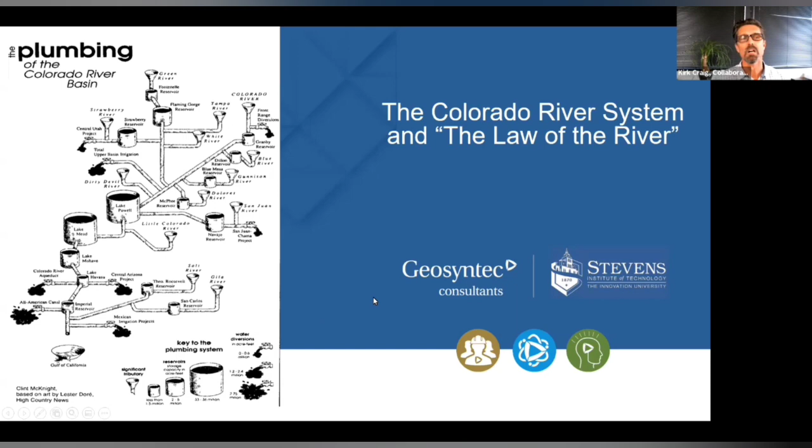This is a cool little illustration I got, from the High Country News, a publication up in some little podunk town in Colorado, made back in 1986. It makes you think of the Colorado a little differently, especially when you look at the lower left there, this great gulf where the mighty Colorado that carved the Grand Canyon now fizzles out before it reaches the Gulf of California. The reason is we just plumb everywhere, diverting and maneuvering and storing every penny and every drop, and that's what's led to this.

I won't really go through all these. It shows how long the Colorado River is - about 1,000 miles less than the length of the Mississippi River, and the whole Colorado River Basin is quite a bit smaller than the Mississippi River, but relative to it, we work this river hard.

I don't know if you guys talk about acre feet per year - always when you talk about big volumes of water, we talk in acre feet. One acre foot is about 320,000 gallons, enough to supply a typical family of 5 with water for a year. So you can look at this scale, and that number I have highlighted about the volume of the Colorado River is very controversial - notice 14 million acre feet, but that number is what's got us in trouble.

This slide illustrates the little red things, which are all the diversions. Like we talked about in the last slide, there are little taps that come off the Colorado River. The red has taken water away from the Colorado River and out to major metropolitan areas: Southern California, LA, San Diego, Phoenix, Tucson, Salt Lake City, Las Vegas. It's important later because when it comes to water rights, the date at which that new supply line pulled off the Colorado River is what gave them grandfather rights.

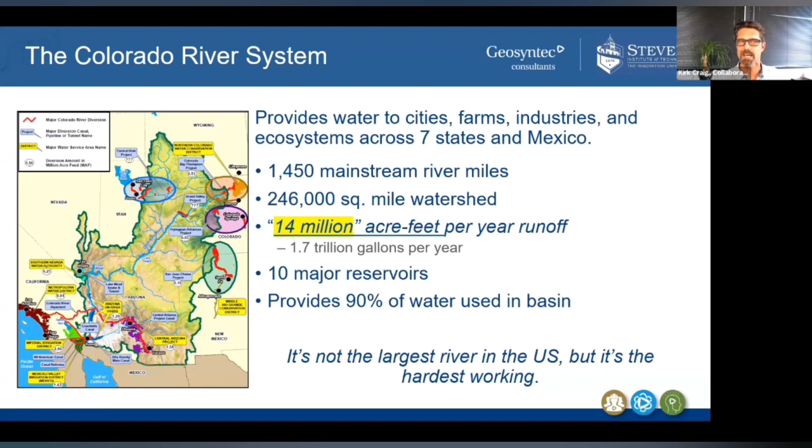So when they go to cutbacks, it goes in reverse order. Interestingly, Arizona, where I live, has the largest portion of the Colorado River but has the least grandfathered, most junior water right. So even though we share all that, we're going to get cut first compared to California, who tapped into it first and diverted to San Diego. So anyway, a little bit of background.

Go ahead, Tasha, next slide. I won't really talk about these. This is just to show you how large the Colorado River Basin is, how many different tribes and cities depend on it, and the amount of habitat associated with it. Its GDP puts it as the 12th largest globally if you look at its gross domestic product. Next slide.

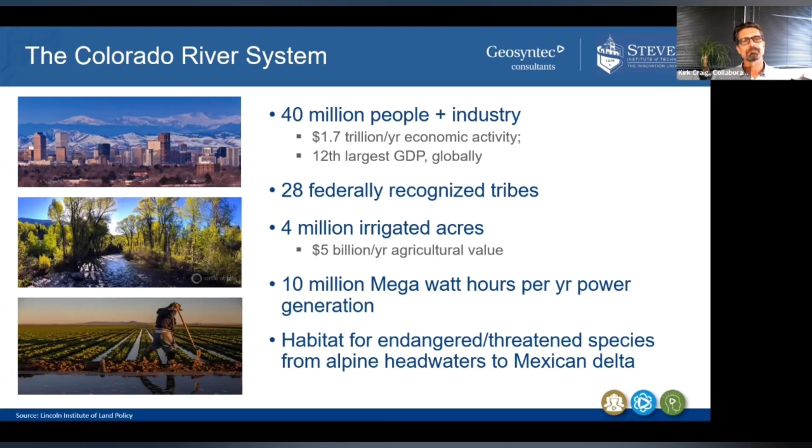So Lake Mead is the barometer, the thermostat. It's behind Hoover Dam. There's some eye-opening quotes here from about 4 years ago. I first did this presentation in 2018, titled 'Where Will My Water Come From in 5 Years?' Unfortunately, when I first did it, things sped up even more since. The picture on the right shows Lake Mead, and the level on Lake Mead is what dictates these water cutbacks. All these states got together and said, okay, when Lake Mead hits these levels on the left, that's feet above sea level, we'll trigger these shortages.

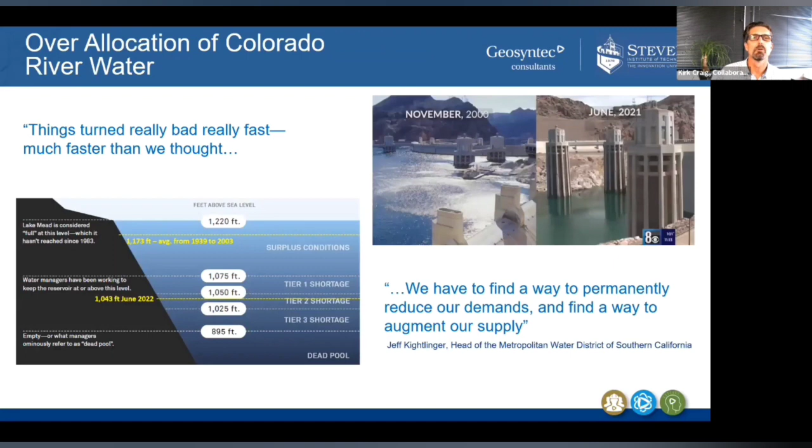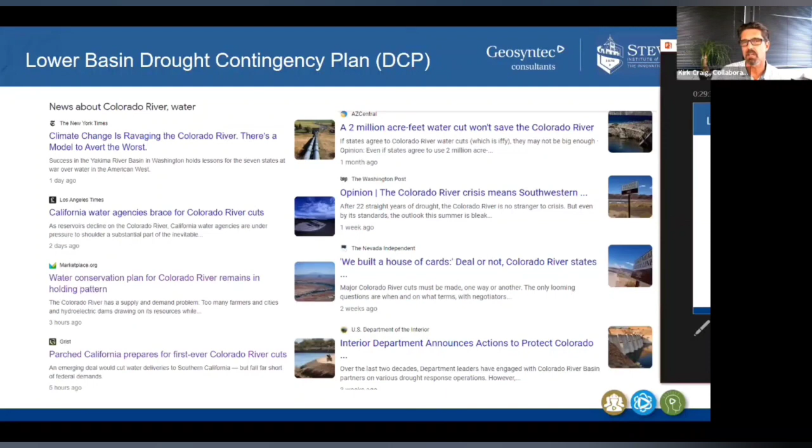This is the news now, from today. Pull that off — now look at Lake Mead. So now we're fast forwarding to 2022, and I had that line, and you can just kind of see the trajectory, the average elevation of Lake Mead.

And remember, the deficit is just being pulled from Lake Mead. Over the last few years, the Colorado River Basin has been producing about 12 million acre feet. When you look at a million acre feet, that's 320 billion gallons, that's a million households of 5 for a year. And we're taking that where we're actually at a deficit of something on the order of 4 million. So there's a big deficit and a big problem happening in a great portion of the United States.

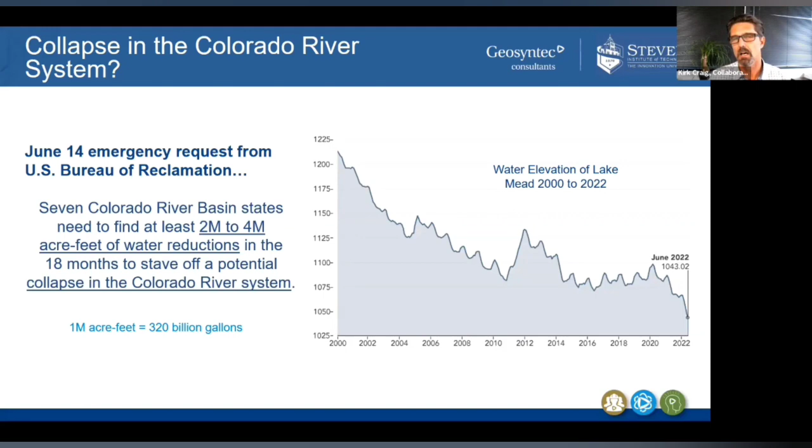Now you guys can kind of see the framework and the history and how we screwed up way back in 1922, when we didn't even have any foresight of the drought and the growth and climate change and things like that.

So what this means for me personally, and this is what's happening, is now we're going to have to really take advantage of every drop. It's been interesting being in Arizona and going to California and seeing these signs about don't use water, we're getting rid of grass. And Colorado, they've had water restrictions. Arizona, Wild West, we just said hey, until we see it really affect us, we're not going to do anything. And now we're trying to catch up.

One of the things the Arizona Department of Environmental Quality is doing, along with agencies in some other states, is direct potable reuse. That's where they take effluent from a wastewater treatment plant and go right into a drinking water plant. Maybe everybody gets a little bit of a shock factor, but we'll get into reasons why that might just be common, where we don't even think twice about it, later.

So Arizona, I told you how much we get, here's the percentage. The Colorado River also supplies a ton of agriculture. One thing Arizona's been bragging about is that we don't use more water than we did in 1970, but our population is like twice or three times what it was. So they brag about that, but it's really just because we're phasing out agriculture. We're breaking even, and industry is growing out here. So I think that's kind of a weak argument for us.

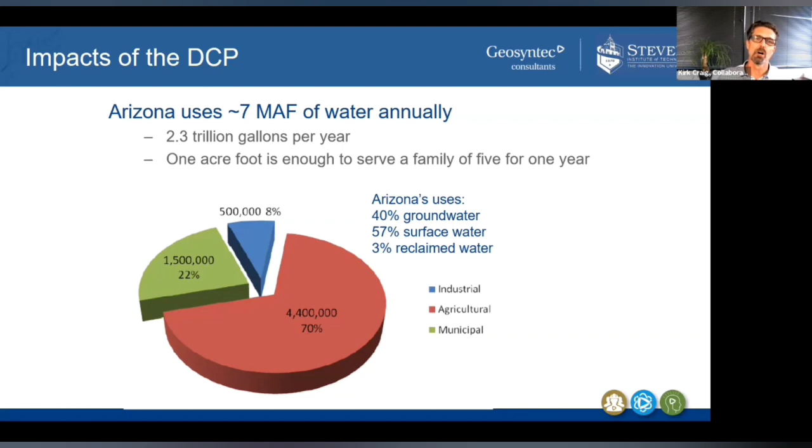Here's the distribution. See how low reclaimed water is? Right now we use this water and we just let it go back out. We don't necessarily capture it all. So that really needs to grow, and that's what my office is going to help work on.

So here's the breakdown. To give you an idea quickly, when I talk about reliance on the Colorado River, the city of Phoenix is 98% reliant on surface water. So that water all goes into that component where now Arizona is expected to cut back the equivalent of millions of households worth of water. So now what Phoenix is doing is turning on the pumps in the ground. They're shifting. They're taking away their Colorado River reliance and starting to pump from the ground.

Scottsdale, same thing, they're a little less reliant on surface water, and some of these cities are actually taking water from tributaries that feed the Colorado River. But Scottsdale is cool, and I'll talk about it a bit more. They have a 20 million gallon per day wastewater treatment plant with a contract with 22 golf courses, which does help me feel a little bit better about living in the golf course capital of the world here in the middle of the Sonoran Desert. And that may change, we may see that forced over the next 5 years.

But they're also the first agency in Arizona to get a direct potable reuse license, and we're helping redo that program, which I'll talk about. The other ones, like Goodyear, are 100% groundwater, et cetera. Tucson's interesting, they say 100% groundwater, but really they do what's on the next slide.

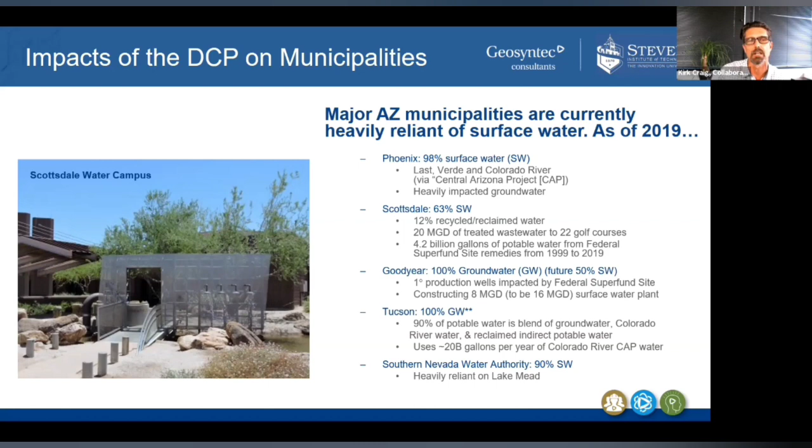Remember, Tucson says they use 100% groundwater, but what they do is interesting. The way we reuse water here, remember this is important because now that we have to come up with these millions and millions of gallons, we waste millions of gallons to our wastewater treatment plant. There's three ways you can reuse it, what you call indirect reuse.

And that's what Tucson does. They inject all their wastewater effluent, or re-infiltrate it into the ground, and then pump it out of the ground, say a few thousand feet down gradient, or a few miles down gradient. They use the ground as the final buffer. You could use a river, you could use a lake. So that's indirect. And then there's direct supply, where you see it's coming right out of a wastewater treatment plant. Geosyntec just got the contract to help ADEQ write their rules and regulations for that program.

And then there's unplanned de facto reuse, which is kind of what happens now. You discharge into a basin, a river, whatever, and eventually that water gets reused for drinking water. I'd like to say we're all drinking dinosaur pee probably right now because there's a water cycle.

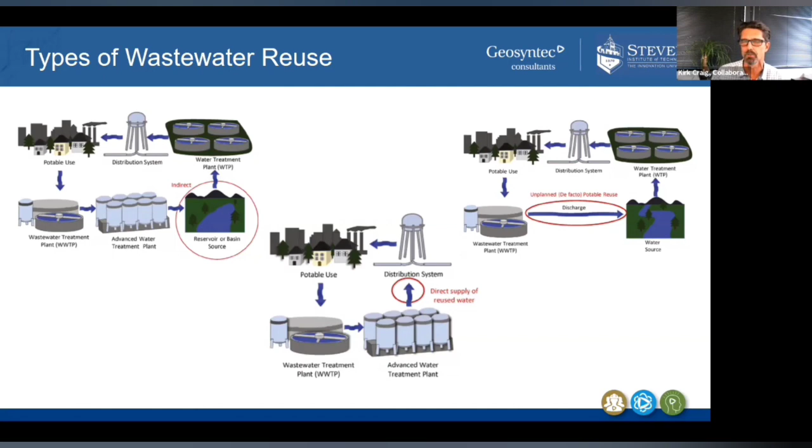Here's some examples of what we're doing. Groundwater is deep here, so in Arizona we push it back into the ground, either with injection wells—called an aquifer storage and recovery well—where we're taking wells that do thousands of gallons per minute sometimes, and we push the water back out into the aquifer that we can pull out later because it moves slowly in the subsurface, or we'll let it re-infiltrate.

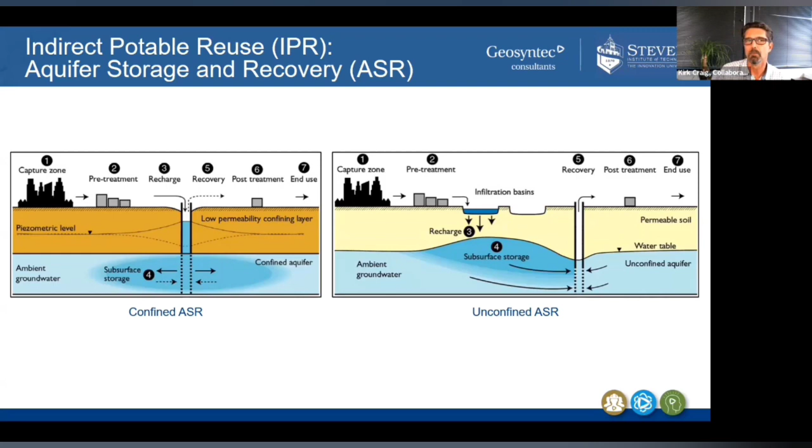Go ahead and click on that left picture. I'll just play it while I talk. That's a big reinfiltration project that a water utility does. This is a really, really large structure, and they'll allow, what does it say, 350 billion gallons of water.

So what Arizona has been sneakily doing is saying, hey, for years we're not using our allocation of the Colorado River water, but we're going to divert it and let it infiltrate into the ground and store it for later. The figure on the right shows elevation changes where, in Tucson, they've been doing this. Green is neutral, purple is where it's been drawn down, and orange has been mounded—they actually mound the groundwater and store it later, reinfiltrate it, and bank it. So that's indirect recharge, and we've been doing that in Arizona since the 80s.

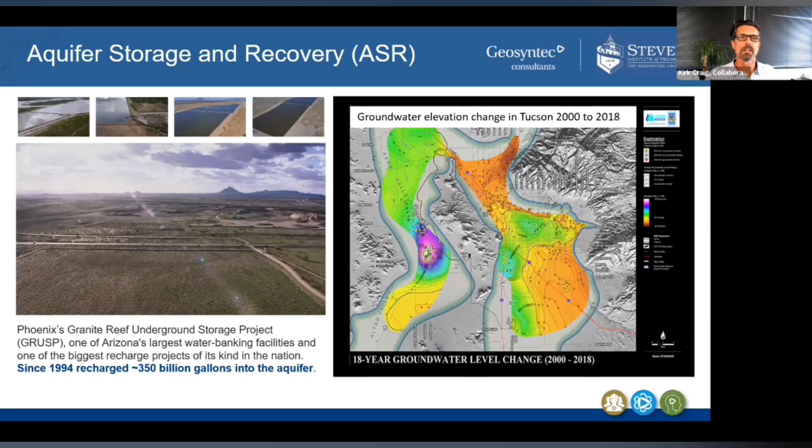So there's purple pipe you'll hear about, and Tucson was big on this, where they actually take effluent—talking 40 million gallon per day type plants—and take effluent from that and spread it around, instead of wasting it and letting it go into rivers, using it as influent. Phil will get into this more, where it goes right into industries with purple pipe that says, hey, this is not potable. They take great lengths to keep things separate, so there's no way, from a public perception standpoint, that our wastewater effluent gets mixed with our drinking water.

And then they also use it to make restoration projects. So here, this is an area where the river was dry because it got diverted, and now it's moved back into play, and some endangered species and things are finding refuge there.

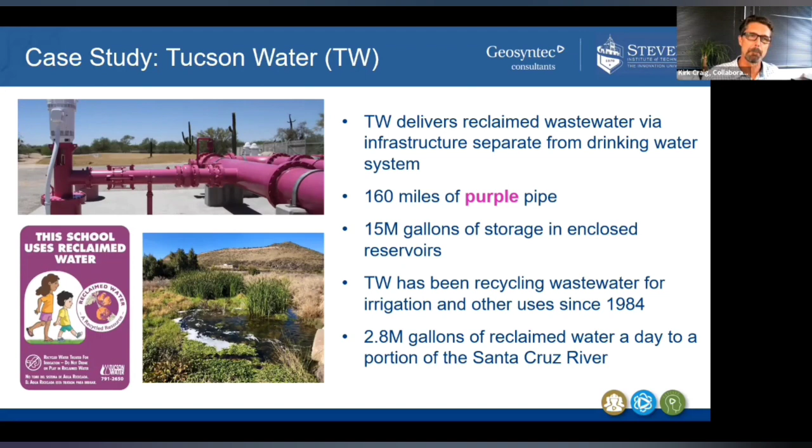So, direct potable reuse—I told you Geosyntec got this contract. We're super excited about it. We're going to help them write their direct potable reuse program over the next two years. The reason we're really well suited for this is because you do a process to get municipal wastewater to where we can discharge it into the environment, and then we take clean water from the ground and make it into drinking water. But in order to get from effluent to drinking water, it takes very advanced processes.

Geosyntec is used to that because we treat industrial wastewater a lot, and industrial wastewater's got cocktails of really crazy and fun, from my perspective, stuff. So it's all these technologies you see listed there—reverse osmosis, advanced oxidation, et cetera—that bridge that gap. I think that's why Arizona likes us, and why we're really excited about this big trend to use direct discharge once the public gets as used to it as indirect potable reuse, for direct potable reuse.

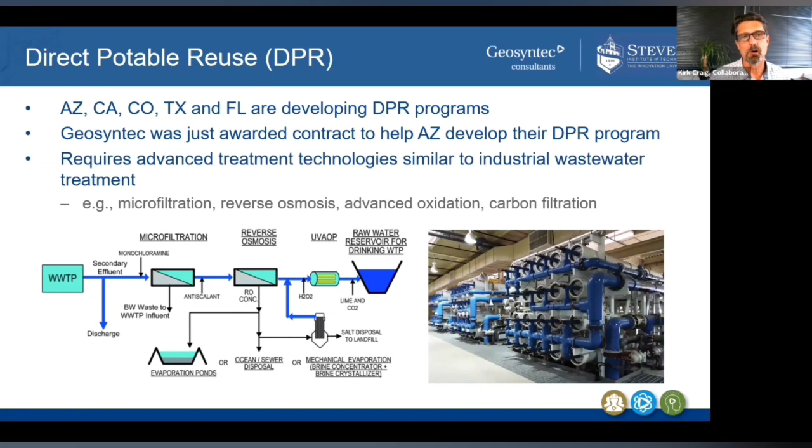Thanks, Kirk. Yeah, so I'm going to talk about a regional perspective from California. The challenge in California is similar to what Kirk was describing for Arizona, but here the majority of our urban population is not really exactly where we have the majority of our precipitation, and we also don't have enough supply within the state to meet our demands.

70% of California's precipitation falls as snow in the northern part of the state during the winter, and yet 75% of our need is in the lower two-thirds of the state. So we've had a number of major infrastructure projects across the state—aqueducts, dams, and reservoirs.

And like Kirk was saying, we do get quite a bit of our supply from the Colorado River. Los Angeles alone imports 50% of their water from the LA Aqueduct, the Colorado River Aqueduct, and also from the State Water Project. Those three aqueducts alone are more than 1,300 miles in length, which is actually even greater than the length of California itself, which is 900 miles.

Combine that now with our drought conditions, like Kirk was talking about. The last 20 years have been the driest we've experienced in California for over 1,000 years. Our reservoirs across the state are at about 41% of capacity compared to our historical average of 60%. As Kirk has discussed, there's continuing restrictions on water usage from the Colorado River due to these drought conditions. 40% of our drinking water supply comes from groundwater, and our reliance on groundwater has resulted in overdraft and unsustainable groundwater usage in many of the basins.

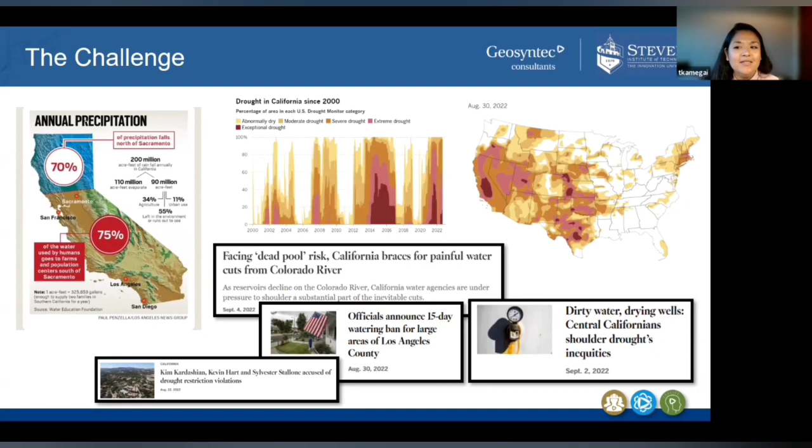So just looking at the early stages of water reuse as one component of the solution to California's water issues. Water reuse is not a new concept in that solution. The first discussions around water reuse actually go back to the 1950s and 1960s, when water demands were increasing in Southern California due to residential development and a little amusement park that we have in Anaheim.

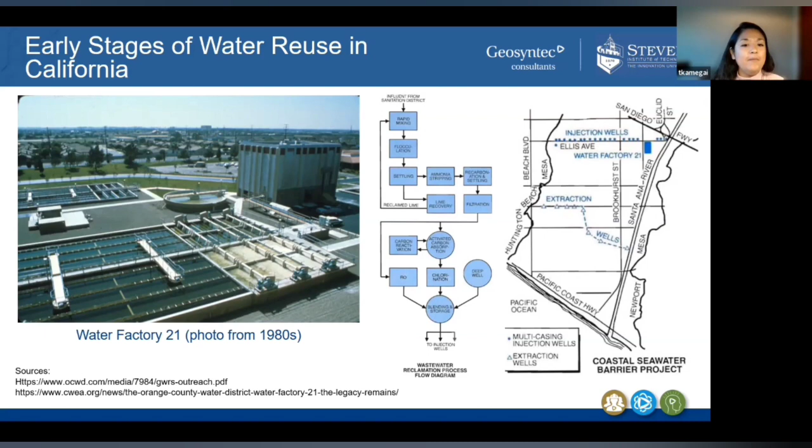This is part of the brochures that were distributed to the public when they were first rolling this out and getting public buy-in on the project. The project was very fundamental to California's reuse story. In the 1990s, the Water District and the Sanitation District started on a new endeavor to treat wastewater and inject it to recharge a drinking water aquifer, so indirect potable reuse. That became the Groundwater Replenishment System.

So that brings us to the first example highlighting indirect potable reuse. This project was first discussed in the 1990s and became operational in 2008. This system takes wastewater that would otherwise go to the Pacific Ocean and treats it, producing high quality water that meets all the state and federal standards. It supplies 100 million gallons per day, and it has produced over 375 billion gallons of water. There have been a number of benefits to the system, including reducing our dependency on the Colorado River.

This treatment system has a number of advanced treatment processes. You can see the filtration here, RO, and also UV before it goes into the injection wells. This system has actually supplied 35% of the recharge in the Orange County Basin, that's then extracted for drinking water.

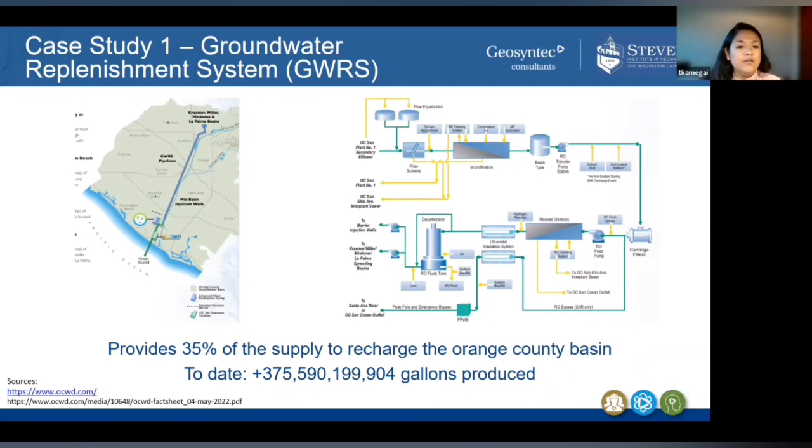So this next example I want to discuss is the use of groundwater that's been impacted with contaminants for direct potable reuse. We have 515 basins that provide 40% of our water supply in the state. In some areas, they even rely on groundwater as 100% of their supply.

In 1997, the Division of Drinking Water for the State Water Resources Control Board developed policy memo 97-005 to provide guidance for direct domestic use of extremely impaired sources. This memo outlines the process of how to use a contaminated source and assess if it's viable for treatment to use as a drinking water source. This policy walks through all the different steps needed to characterize the aquifer, look at the different compounds that may be there, and assess the type of treatment that may be needed.

As you can imagine, the requirements for treatment of these contaminated groundwater sources can be quite complex, given the concentrations and complexity of the contaminant mix.

Just walking through an example of the type of treatment processes that would be needed: first, groundwater is extracted and then conveyed to a treatment plant. You'll typically have liquid-phase granular activated carbon vessels to remove volatile organic compounds, which are adsorbed to the carbon media. Then ion exchange is used to remove compounds like perchlorate.

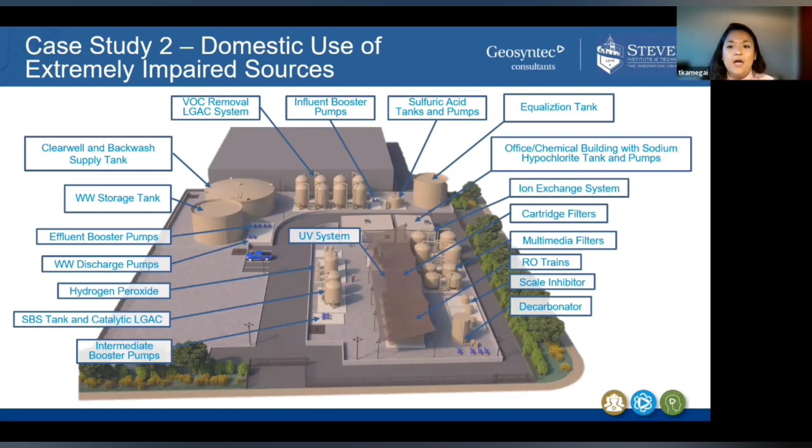Following that, reverse osmosis will remove other inorganics. Reverse osmosis can remove things like total dissolved solids and then other compounds like hexavalent chromium, selenium, and nitrate. This is certainly a complex and challenging process to implement direct potable reuse of contaminated groundwater.

Some of these challenges include just the evolution of drinking water standards, new and emerging contaminants that are identified, advances in technological or toxicological research, advances in the technology to actually detect these compounds, which ultimately can result in a lower screening level for these compounds and detect lower concentrations.

It's also a very complex regulatory environment, and also public perception is really crucial to have a project move forward. So it's really imperative to have the public acceptance and involvement during the decision-making process.

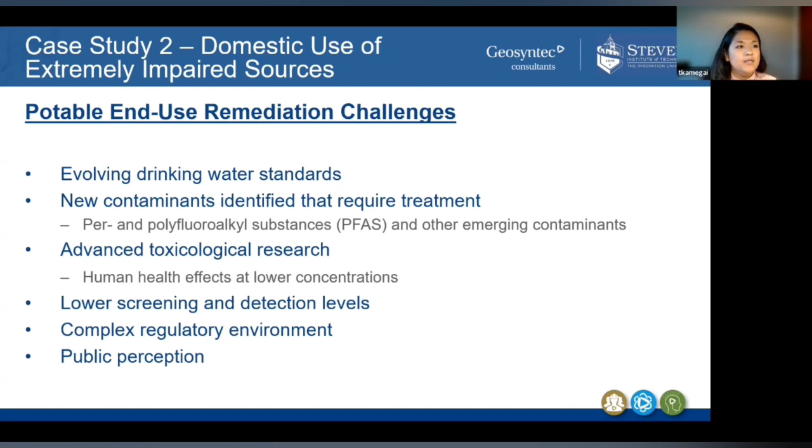Thank you, Tasha. So as Kirk mentioned, a lot of the technologies that we're looking at for water reuse have emerged out of the industrial marketplace. And industry has really had an interesting relationship with the whole water cycle with water reuse. In some cases, industry is the last group to get a water allocation. You've got water for people, you've got water for agriculture, and water for industry, and sometimes industry comes in last in that pecking order. And so companies have had, by necessity, to start to figure out how to do more with less, how to be able to operate and continue their production despite an inconsistent water supply.

Next slide, Tasha. So this is an example of some of the water sustainability goals that are publicly available by major U.S. and international companies. A lot of them are watershed based. They talk about their place within the water universe, within the water environment. They talk about replenishing all of the water that they use in their production, in many cases, doing that by 2030. A lot of these goals were written around the 2020 timeframe and before, and 2030 was kind of a magic year. You'll see a lot of, we'll get this done by 2030.

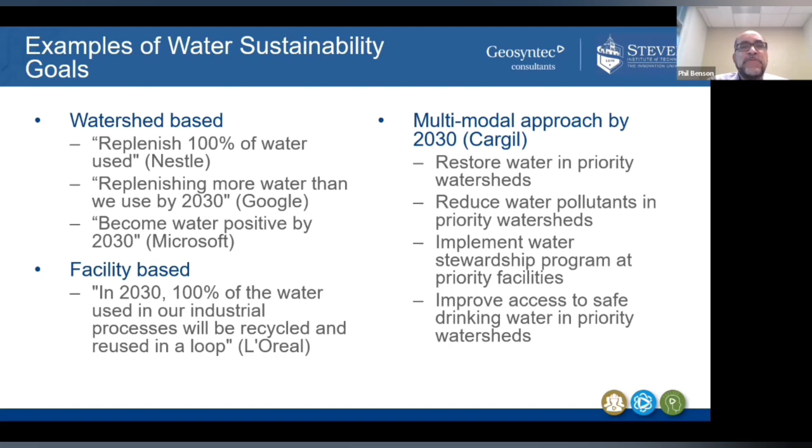So when we look at water use and how water is used in industry, obviously this constitutes a really diverse set of facilities, depending on what market you're in. A lot of industries use cooling water, and so cooling becomes a big target. How do you reduce the amount of water that you use for cooling operations? How do you use different quality sources for cooling operations?

Another big user for water is air pollution control, scrubbers and other technologies to really prevent discharges to the atmosphere. Dust control at certain facilities is another big issue with power plants, facilities that have ash, cement manufacturers have major dust control issues and use a lot of water for dust control. The whole air handling and climate control piece generates and uses a lot of water, as well as irrigation and beautification.

We talk a lot about how irrigation fits into the whole water balance, and what makes sense in terms of irrigation techniques or landscaping techniques that don't require water, to reduce water use. Or even in some cases, looking at irrigation as a positive discharge point for lesser quality water as part of a water reuse strategy.

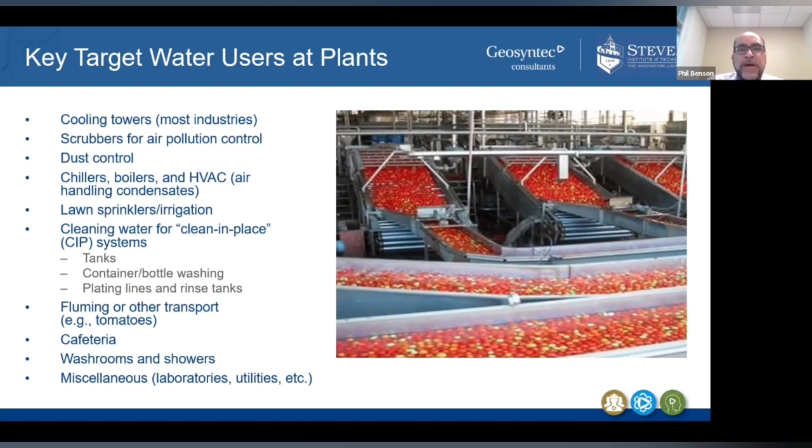So when you look at water reuse, a big part of it is actually how do you minimize water use, how do you optimize water use, and then how do you go about looking at that water and what can be reused. So, correcting leaks, preventing unintended losses from the system, really looking at rinsing and cleaning and what do you need. As you go into facilities, you find a lot of places where they do things because they've always done them, not because they need to do them for product quality. So what is the quality of the product that's required, and are they actually over-rinsing, over-cleaning to get that quality?

Cooling water can be an art. There's still facilities that use once-through cooling, so obviously cooling towers offer an opportunity to reduce that pretty readily. But then even when you have a closed cycle cooling tower system, how do you optimize cycles of concentration to manage the water chemistry? Again, that can be as much an art as a science.

Looking at water use and product formulation, and then indirectly, what's the water balance for energy production. And then, as Kurt talked about earlier, are there sources of water available to you that meet your quality requirements that are not fresh water, that are not potable water sources, that aren't taken away from other parts of the environment?

An example of a purple pipe system close to Washington, D.C. is Loudoun County, Virginia. Loudoun County is the data center, the data capital of the United States in a lot of ways, and there's a couple of reasons for that. One is that when the whole data industry was first evolving, the first big player there was America Online, and they were based in Loudoun County, Virginia. So they built the data highways, the pathways by which data is moved around - that infrastructure for data transport.

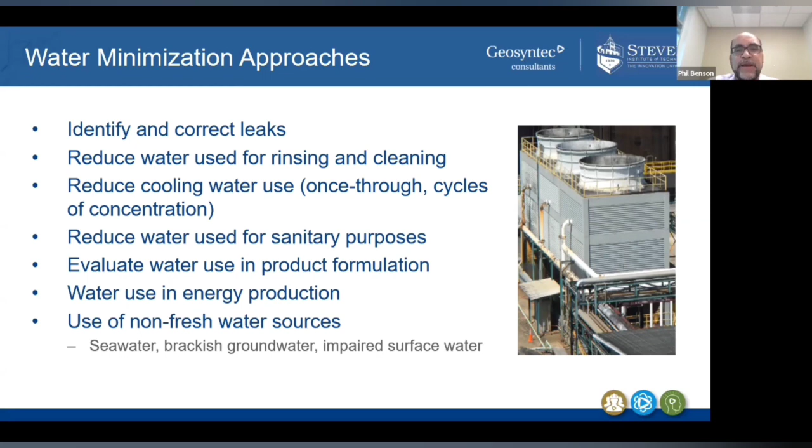But the other thing that happened is that Loudoun County developed a purple pipe system where they carved out some of their municipal effluent, treated it to a higher standard, and actually put it back into the distribution network in a purple pipe to be a cheap source of cooling water for cooling-intensive facilities like data centers. And so it really was an incentive for those facilities to build in Loudoun County, and now it's known as the data capital of the US.

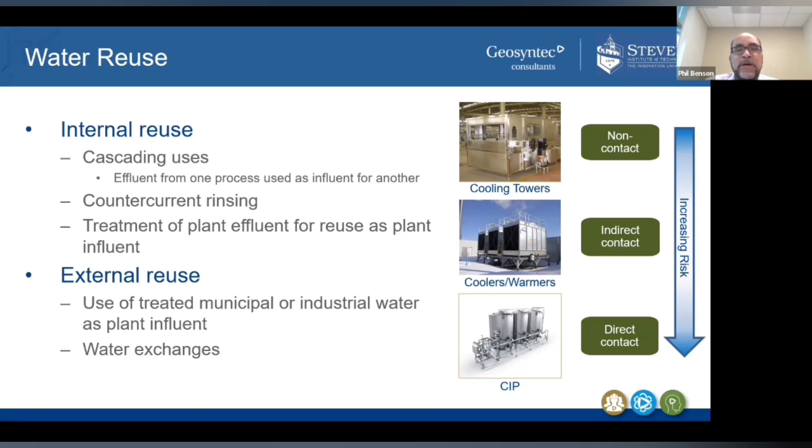So when you look at, and I'm going to try to pick up the pace a little bit to make sure we have time for questions and answers, some of the things you have to consider for reuse, there are different kinds of parameters than you might consider for treatment and discharge. You have to look at things that could cause fouling and plugging, iron, silica, suspended solids, things that could cause microbial fouling, BOD, the food sources for organic growth, nutrients for organic growth, even pathogens. There have been instances of Legionnaire's disease, for example, in cooling water systems that weren't well managed.

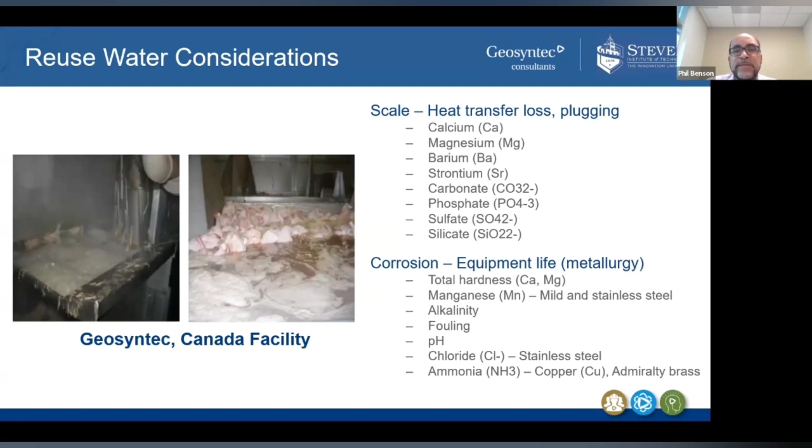You need to look at compounds that could cause scale under certain circumstances, especially as temperature changes. You may get changes in the ability of something to scale, and if it starts scaling where you don't want it to, it could muck up your reuse system. On the opposite side, you also need to pay attention to whether you're potentially causing corrosion, whether you're going to deteriorate some of your plant infrastructure because your water is becoming more aggressive and corrosive and impacting your metal conveyance materials.

So when you look at implementing a water reuse and recycling project, the first, and in a lot of ways I call this the most important step, is really doing a comprehensive water audit. Understand what you're doing today. You'd be amazed, as you get into older facilities, even newer facilities that are worried about production and making a profit, they don't necessarily know how they're using water and really understand all the water sinks, all the water sources, all the things contributing to the amount of water they're using. They may have leaks that haven't been identified, and a lot of times these audits will show that a pipe's been leaking for years, and no one knew it, and it's just been leaking to groundwater, and they've been using more water than they expected to use.

Really looking at your processes and integrating them throughout the facility, what's the water use of each process, what's the water quality requirements of that process, what kind of water is discharged from that process, and how does it link together in an overall facility balance? That kind of roadmap gives you a list of your choices: what are your options for reuse, what treatment is needed to successfully reuse, what do those treatment options cost, how do you validate their effectiveness, and how do you make sure you continue to be within compliance of your permit conditions?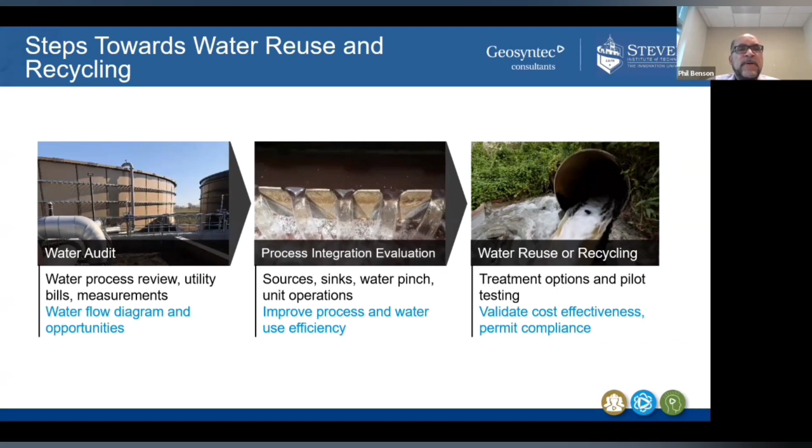So this is kind of a typical roadmap of an operating facility. You can see you've got three major kinds of users. You've got process users, where really you're using water to generate the product, and you may have losses associated with that, you may pick up contaminants from that. You've got cooling, and most facilities have some sort of cooling process needed; a lot of cases that's evaporative, so you'll have a water loss through evaporation. And then you'll have water for people, a sanitary need. Those will be combined with some sort of storage to enable your water supply to be more reliable. And obviously, at the end of the process, you'll have to have some sort of treatment and ultimately discharge that water from your facility, either back to the environment or into a sewer system.

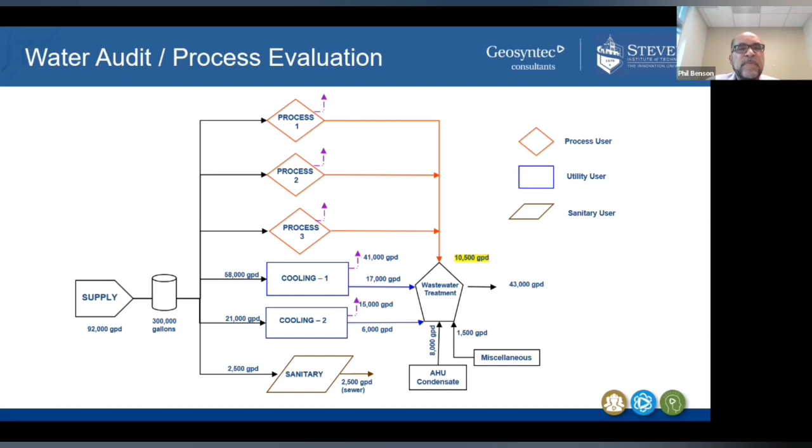So a couple of case studies to demonstrate how we go about doing this. This is a project we did for a pharmaceutical manufacturing facility in Arizona, and the stars indicate the things we changed.

When we started this project, a city water source was used for all the water in the plant. About 40% was used directly for the product and production lines, either product formulation, cleaning in place, or equipment wash down. About 25% was used for cooling, 25% for sanitary and other miscellaneous uses, and 10% for landscaping.

This client was driven by corporate level sustainability goals. They wanted to look towards getting closer to zero discharge, reducing costs, and managing risks of water interruptions and being prepared for that.

So in a number of strategic locations, we increased storage to give them more resiliency, converted to a different landscaping strategy to eliminate that 10% irrigation feed, and if you look at the flow diagram, we took water that was treated and previously discharged to a POTW and recirculated it for cooling, reducing the amount of water used by about 35% for the facility.

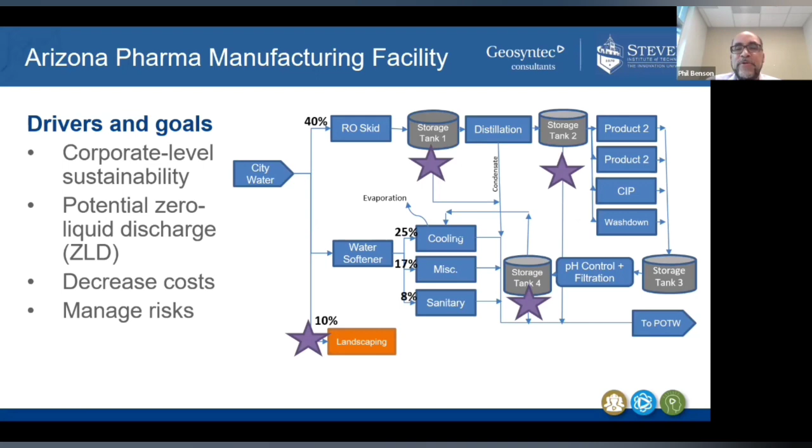A few challenges: it was a complex flow diagram. The cooling tower water demand fluctuated, which is why we put increased storage in place to allow cooling to accommodate reuse for 90% of the year. And we changed the irrigation out because it was a large water sink.

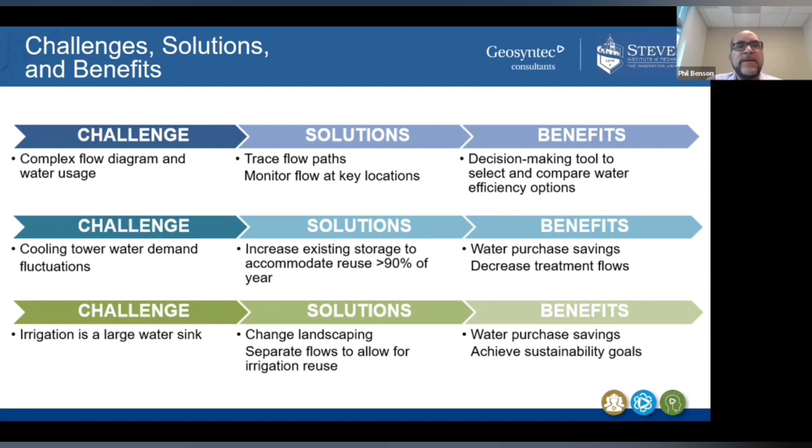I'm going to try to wrap up with a second example. This is a cement plant water management strategy, where water is used and also produced at the quarry by precipitation. It's used in crushing and aggregate washing, and it's also used extensively for dust control.

In this project, we tried to improve both the dust control and tire washing operations to normalize the amount of water used. Instead of discharging treated wastewater from the wastewater treatment plant, we reused that for some of the dust control operations, reducing the amount of city water required.

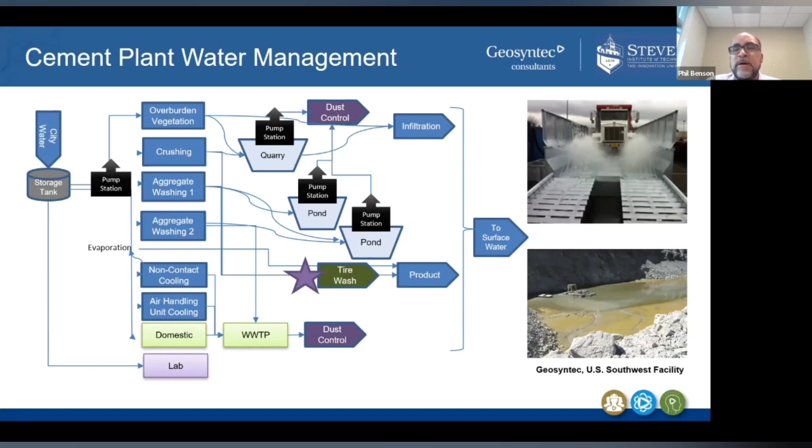We also used some of the precipitation, the quarry water that comes from rainfall, captured that and input it into the dust control systems, reducing the amount of city water used. So we tried to reuse water of adequate quality into the operations needed to successfully operate the plant.

A couple of challenges here: it was a complex water system with a not well-defined pumping operation. Through metering pumps and looking at how things ran, we were able to rationalize their pumping strategy. The tire wash wasted a lot of water and discharged water that didn't need to be wasted.

So we adjusted how they did tire washing. We changed the nozzles and changed the operation to eliminate that wasted runoff. And we optimized storage in ponds and tanks so there was always enough reused water available to supply the dust control and tire washing operations needed.

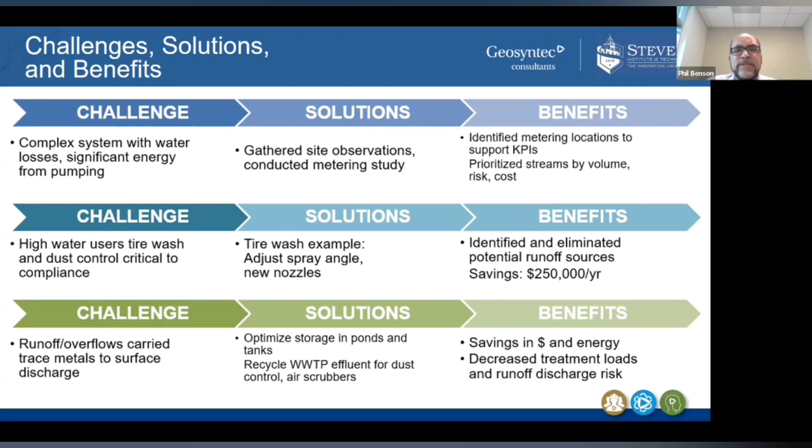I'm going to finish up with one last slide, just for kicks. This is a project we did several years ago for a tuna processor. This was driven by compliance and by a wastewater plant that was overloaded.

One of the things we did, which gets to the value of water footprinting, was isolate high strength wastes, really high pollutant wastes, the red bubbles, from the high flow, low pollutant streams, the green bubbles, and pull those streams out of the treatment plant. This allowed the plant to operate better and gave us the opportunity to look at those streams as reuse candidates, since they produced a low strength material that could be used in other processes without negatively impacting them.

I know I'm getting right on the deadline, so let me stop here. And just for closing, go two slides real quick.

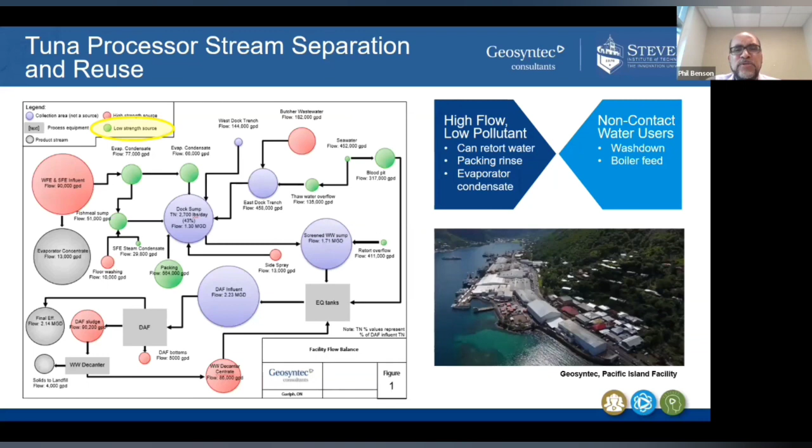One of the things in closing: you're seeing a real increase in what I call the one water mentality, looking at water as one integrated product that impacts everything we do, whether it's rain and storm water, surface water, groundwater, recycled water, drinking water, or wastewater, and really looking at the combined value of that asset across all those subcategories, and how you can optimize the use of that water for society's benefit.

You're seeing that within the consulting community, within what our customers are asking us for, and increasingly within the regulatory community and how they apply the regulatory framework to users of water. Thank you.

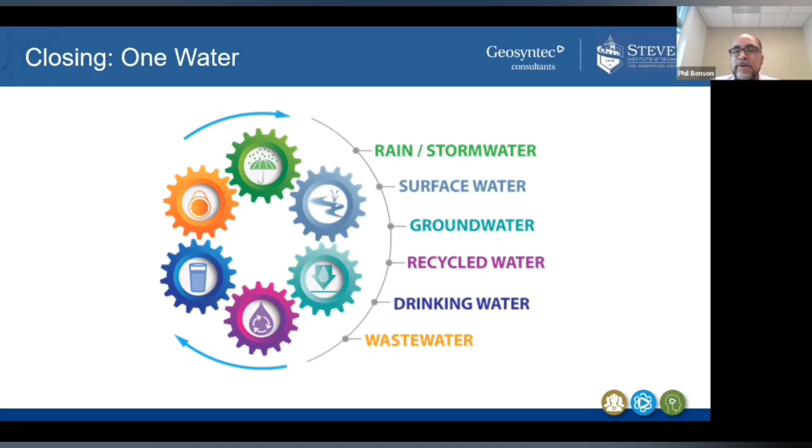Hey, that was a very interesting presentation. I'm glad that we finished right on time.